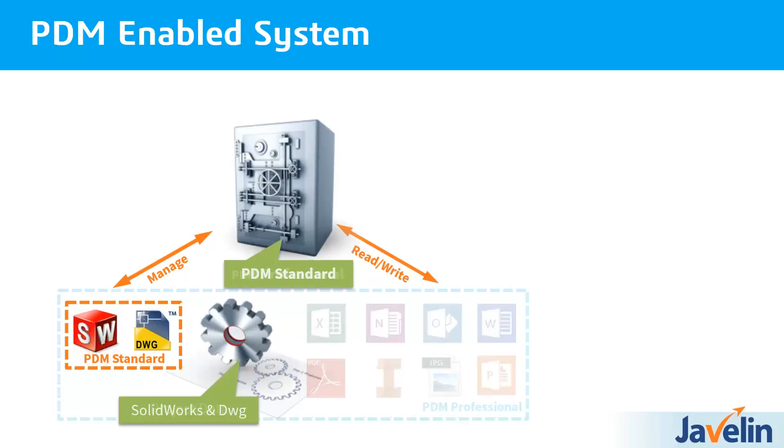Yeah, so just a visualization of how a PDM system works. With PDM Standard, which is SOLIDWORKS' answer to the replacement for Workgroup, we have the ability to manage CAD data—our SOLIDWORKS files and our DWG files. With PDM Professional, our capabilities are extended hugely. We can manage pretty much all of our product data—about 200 different file formats out of the box. We can also automate a lot of our processes, so we can do things like output STLs for 3D printing, or submit a file set to a certain department for testing and validation.

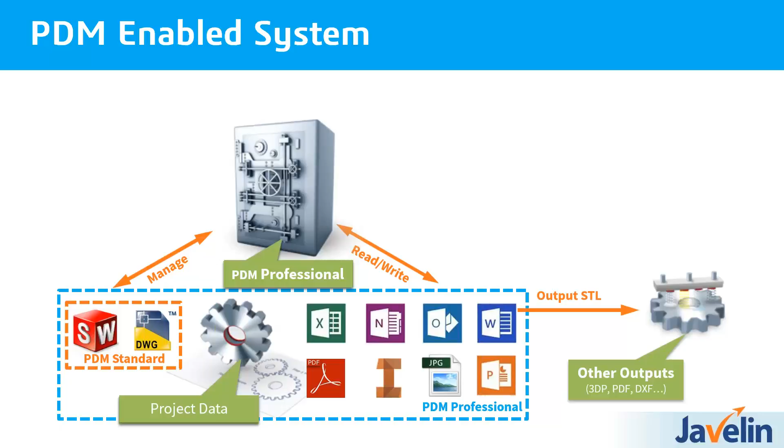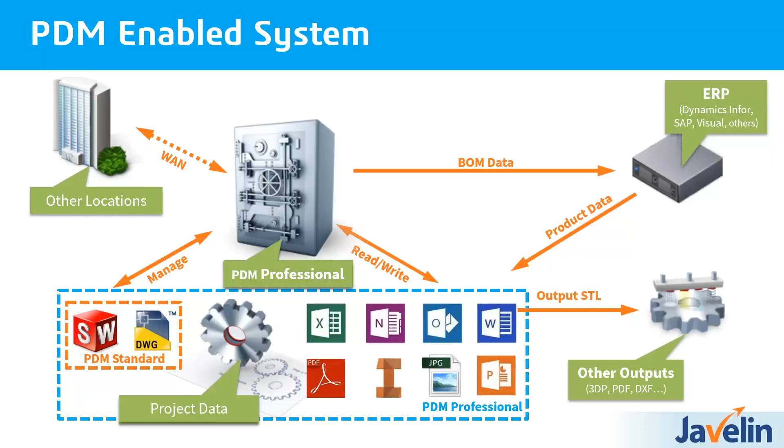We can also have multiple locations on PDM Professional working on the same vault, creating a wide area network. And of course, we can interface with our ERP and MRP systems if we need to do things like grab bill of materials or grab project numbers—we can interface with those programs as well. So PDM Standard is a great start; PDM Professional offers robust customizability when it comes to your product data management.

So today there are three main areas we're going to touch on in the what's new of 2017. We'll be going over the new enhancements in 2017, but also, for those just getting into PDM or thinking about PDM, we'll run through that as well, just so you get a sense of what it's all about.

So starting with the manage aspect of PDM, let's just jump right in and pop into our File Explorer here. If I just go to my main C drive, you'll notice it's the interface we're used to—everybody knows Windows Explorer. We've all had to use it at one point or another; most of us use it every day, at least 8 hours a day.

So it's a very familiar interface. Now I've got all these folders that you would expect to see, but at the same time I also have my vault as well. Okay, so the PDM server is a secure vault. If I double click on that, I've got to log in to be able to gain access to my vault.

So I'm going to log in as Scott E, the humble designer, and once I'm inside my vault, you can see it's generally the same layout, right? It's got the same feel, so there's not like you have to learn a new environment or anything like that. The only thing that's different is that all of our folders are green. Okay, so that's how we know that we're in our vault.

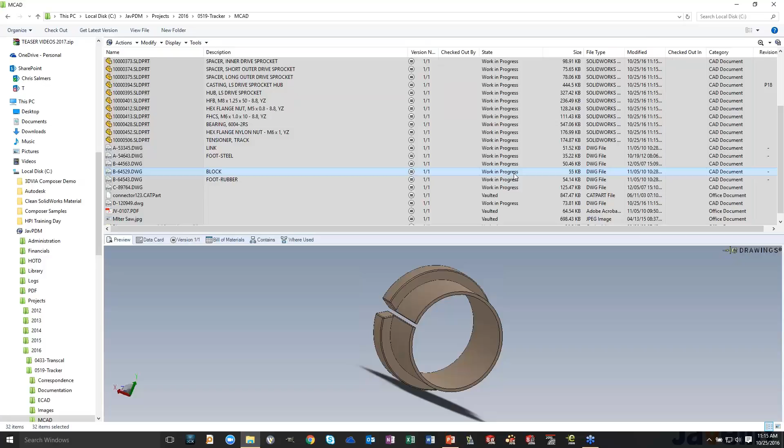So with PDM Pro, again, all of my CAD folders are work in progress, but I also have some folders that don't require sign-off. So PDFs get vaulted right away. Things like pictures get vaulted right away. Right.

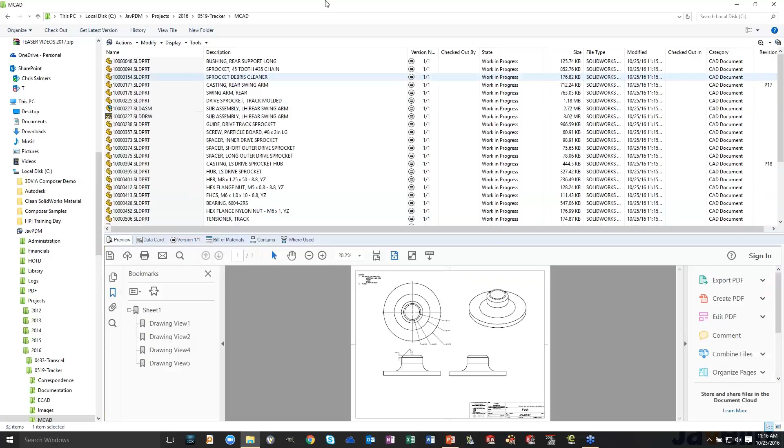So the first big enhancement in PDM 2017 is to be able to overwrite your last version. So you can see over here we've got version numbers, right? And they can get quite large, right? Especially if you're checking in parts every day that you're making changes on. You can get 40, 50, 60, hundreds of versions

of parts. And sometimes you don't want to create a new version because there haven't been any significant design changes. So with 2017, in fact, let's just open up our assembly here.

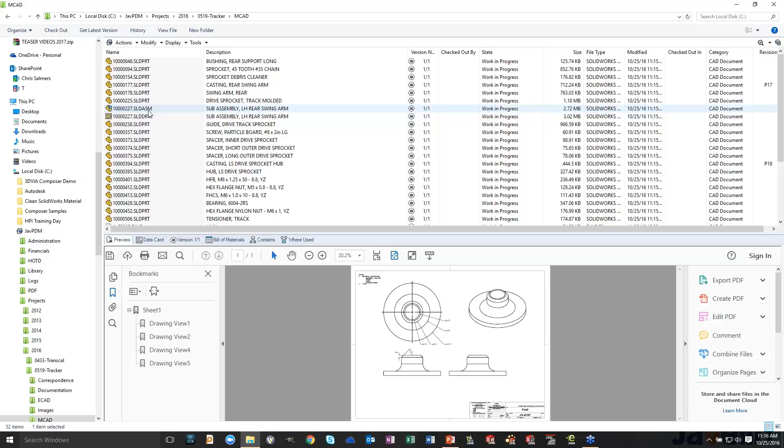We've got the option that we don't need to do that. And what we'll actually do is we're going to show you that in action. We'll show you how to set it up, and we'll show you how to use that as well.

So in this case, let's open up this assembly. Obviously, I don't have it checked out, so it would open read-only, because if I don't have anything checked out, I can't make any changes to it. So it asks me right away, do I want to check this out? Sure, and I can preview all of my parts here as well. So maybe this is the part that I want to make changes to, so I'll go ahead and check that out. And maybe I'll check out the drawing as well. So we'll go ahead and check those 3 parts out.

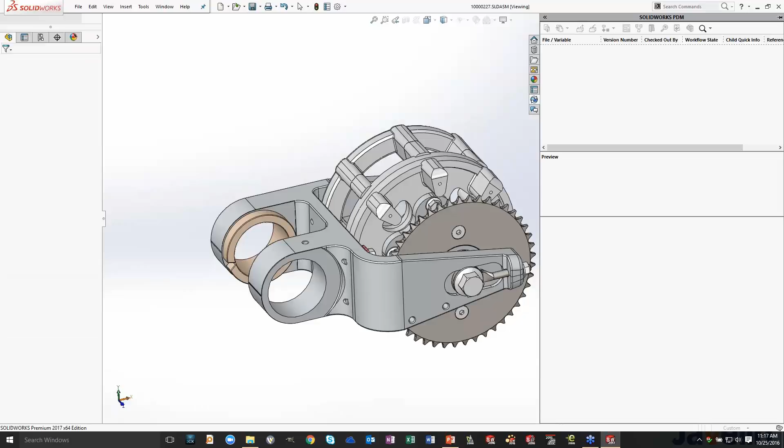And maybe this is the part that we're going to be making the changes to. Okay, so we'll go ahead and pop that open. And maybe we do a little bit of design work, and we kind of get here and we're okay with it. So maybe we want to save this, and we can go ahead and just get my control panel out of there. Let's just move this over here a little bit.

So we get an indicator saying that the part that we have is newer than the part that's in the vault. So we can go ahead and check this in. Now you can see I do have the overwrite latest version, but it's currently grayed out. So we're going to show you how to fix that. So for the first one, let's just say it's a round design that we're thinking about, and we go ahead and check it in, but we keep it checked out because we still want to work with it. We're not quite sure if we're done with it yet.

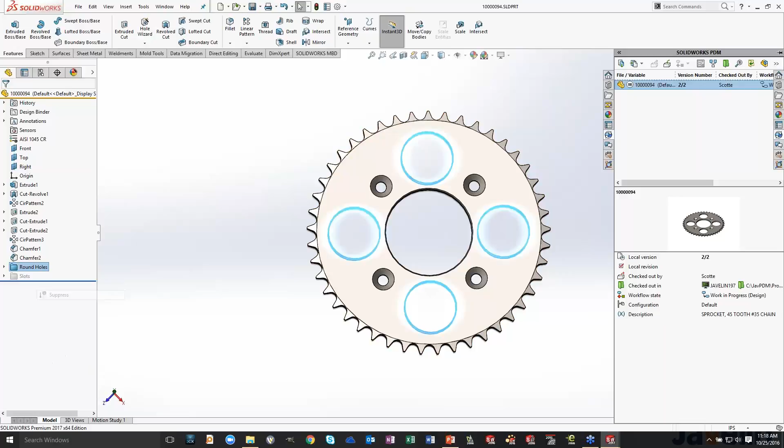So now let's say we do a little bit more design work, and we end up with this design. And this is actually the one that we want to go with. We decided we don't want the round design anymore. Well, we tried to check it in, but again, it was grayed out. So how do we fix that? Well, what we have to do is set some permissions in our administration tool. So if we go into our PDM administration, in this case, I'll go into my vault. And again, it's all secure access, so I'll have to log in as the administrator.

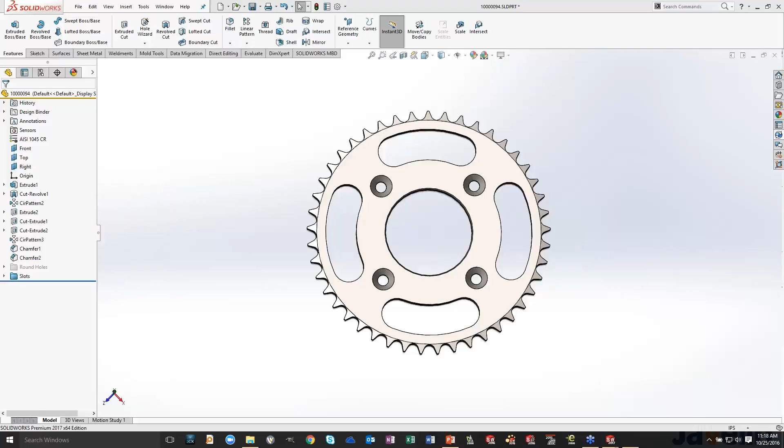And there's a couple of enhancements in 2017 that we can utilize to get this job done fast. So in this particular case, we've got Scott E., who's our designer, and he's part of the designer group, but maybe I don't want to give everybody in that group access to be able to overwrite the last version. Maybe I only want a couple people to be able to do that. So what I might want to do is create another group for designers. So now when we create a new group, we can call it what we want. Maybe we want to call it designer admins.

We can copy from other groups permissions and members. So let's go from the designer group. We can say copy the permissions and copy the members. So this is hugely speeding up the creation of groups without having to go in and reset all of these options. So we can copy those group options.

You can see now if I go into my group members, I've got all the members that were part of the designer group, and I can go through and say, okay, you know what, I'm biased. I like all my Scotts to be admins, so maybe I don't want to make Eric or Alex a part of this. So I can now take away people from that group that I don't want. And if I go through things like permissions, I can go to my folder permissions and say, all right, now let's give these guys access to overwrite the latest versions during check-in. So I'm giving those 2 particular people access.

Same thing in states. Maybe I want to use this through a workflow, right? Maybe I want to go to a design workflow, and during work in progress, I'll say you can overwrite. But notice that all of these other checkboxes are already there because we copied all of those permissions from that design group. So that can save a ton of time without having to go through and set things like search cards and permissions and everything like that. So we've got that set up.

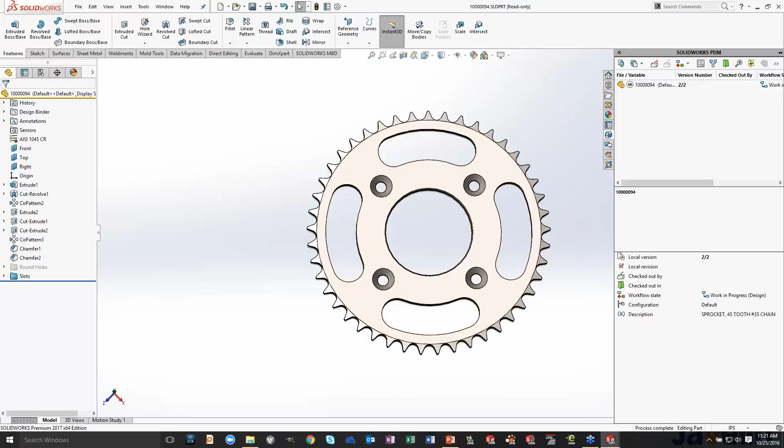So I don't have to worry about that other version that I didn't want. I can just say, you know, overwrite old version. Right? So now I still have version 2. The nice thing is that if we navigate to the history on this file, so if we go to contains, and let's find the one that we were working on there. So if we, whoops, and check out the history, it's still logging in that we checked in with version overwrite.

So even though we are overwriting a version, you might want to keep track of who's doing it and when it's being done. So you can still see that there was a version overwrite being tracked on that file and who did it, and when it happened, so that you can keep track of all the history on your part.

Some new enhancements as well when you're using copy and move tree. So maybe we want to do a right click and do a copy tree and copy this project somewhere else. Now if we select any options, things like including simulation results, naming drawings after models, that sort of thing, whatever we choose is now saved in memory. So when we go to do another copy tree, all of those settings are going to be saved. So we don't have to set those every time. So this is really good if you have a company standard for copying over projects to new folders.

So another great enhancement in PDM 2017 as well is that now the service packs for clients and servers don't have to be the same. They have to be in the same major release. So in this case, you'd have to be in 2017 for both the client and the servers, but they can be on different service packs. So you don't have to upgrade them both at the same time. Maybe there's a reason to upgrade your client and not your server. Not a big deal with PDM 2017.

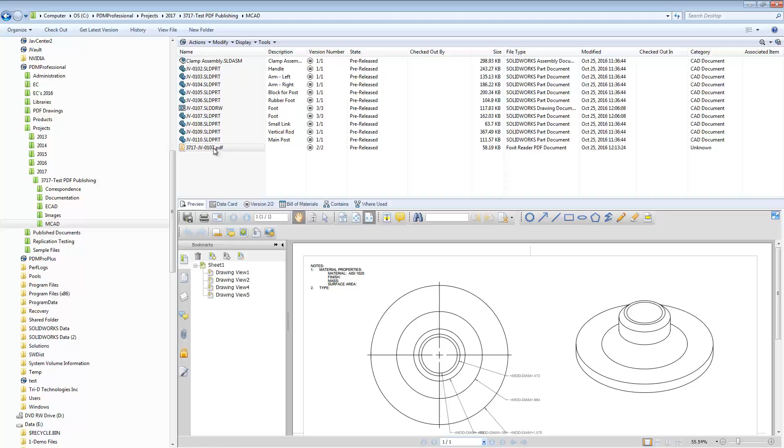Now we can also do this for workflow as well, if we want to do this as part of a workflow. So here I'm in my workflow. I can go into my approved workflow, and I can add in this task. So maybe I want to say at this point execute a task, and maybe we want to say run this only for drawing files when they go through this workflow. Run the PDF drawing task that we just set up, and say save the drawing as PDF. So now we can have this automatically trigger when we submit this for approval.

So let's go ahead and save this workflow. We'll exit out of here, and we'll run this through that workflow. So let's change the state, send for approval. So now we've sent it off to the manager for approval. We can say OK, and we can use our favorite searches, which is great. So we can have a favorite search, which is PDM Pro, and we can see everything that's awaiting approval. So in this case, today, let's filter it out. We can see there's the drawing that we want to use.

We can preview it. Yep, looks good to me. And we can go ahead and approve it. And now when it goes through that workflow, we can put in a password for an extra layer of security. And there's our PDF creation. We can go ahead and hit OK and close our search. And that will create a PDF for us. So a number of different ways that you can utilize those new variables.

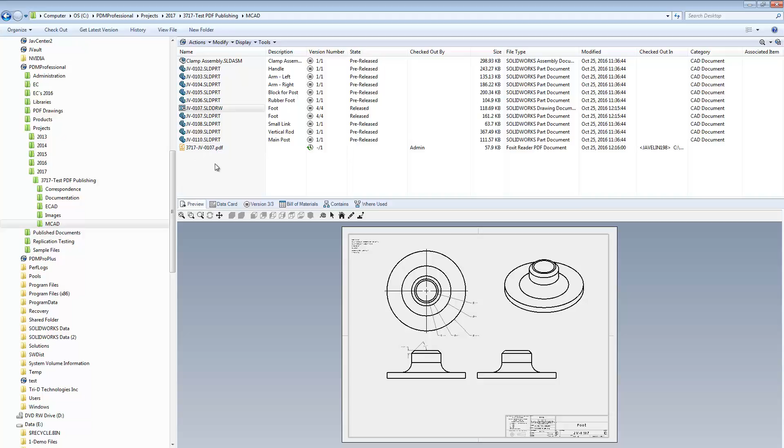And along with those new variables as well, we can do things like DWGs and DXFs to PDF. Right? So it runs the same way as you saw with the drawings, except it utilizes the DraftSight API to take that DWG or DXF file and create a PDF automatically through a task.

And another big one is being able to do Office files to PDF. So let's actually go through how to set that up right now. So first of all, in order to be able to utilize this, let's go into our administration tool. So let's go into, where are you? Well, we can just pop in here.

That's fine. I don't think you have access with your Scott login there, Scott. Yeah, I don't. I think I locked my designer down. Well, you know, Scott E. He's a bit of a troublemaker. I don't like to give him all the access in the world.

So we'll go ahead and log into our vault. You'll notice if I go under tasks, I have a new task called Office to PDF. This is new with PDM 2017. And if you don't see this in your vault already when you upgrade your vault, you can always start a new vault, which I've done right here as a test vault. We can go ahead and log into that one as well.

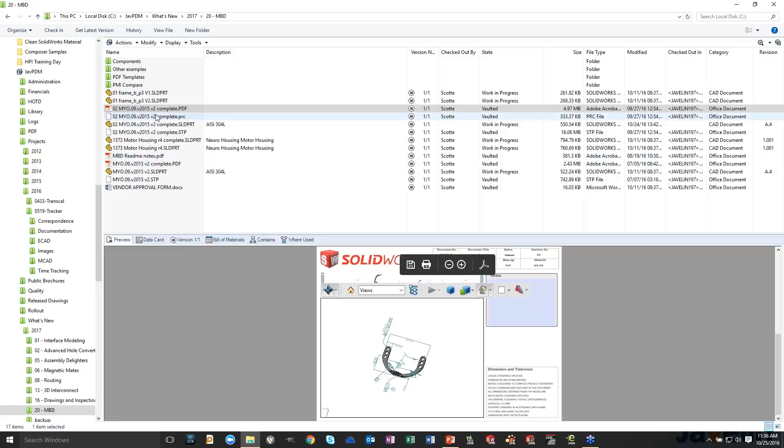Before you move on, because we're using 2017 eDrawings, there's also a number of other file formats you can preview as well. Let's talk about that right now.

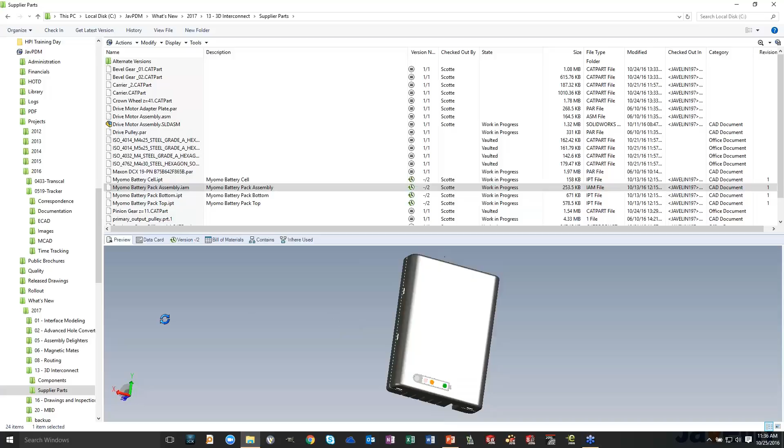With the release of eDrawings 2017, we saw a ton of other CAD formats that we can view and open inside of eDrawings. And because PDM uses eDrawings as its viewer, we can now natively view other CAD system formats. For instance, we can see this is an Inventor assembly, so we have full viewing inside of our viewer in PDM 2017.

We can also do things like CATIA. This is a CATIA assembly, so a huge amount of power there, and it's just great to be able to visualize those right away inside of PDM 2017. To clarify, that includes IGES, STEP, Inventor, and CATIA, as well as STEP AP242, which has that PMI information like you saw with that 3D PDF. Some great powerful enhancements to eDrawings 2017 that are able to be utilized inside of PDM 2017 as well.

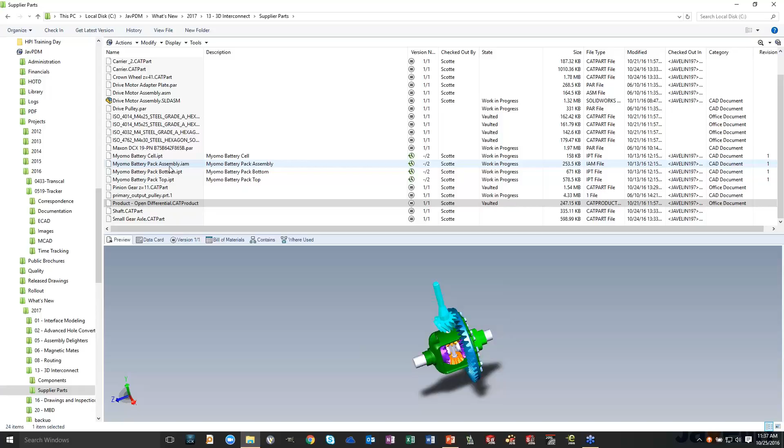Some great enhancements when it comes to automation, especially when it comes to creating PDFs for multiple file types. And the variable utilization is huge, especially when it comes to things like filtering out your parts or being able to keep everything organized—you can add in those variables for quick use.

The last section we're going to talk about is the collaboration side of PDM 2017, the first being our Web 2 portal. Let's jump in and take a look at what the Web 2 portal looks like. It is an online version of our Vault, and we are just in a regular web browser.

We can browse through folders, files, get previews, easily search for folders, and in PDM 2017, things like our Office documents—you can see everything's being shown with tabs. It's a lot cleaner of an interface. Even if we want to go to a Word document, everything displays very nicely.

And again, it's all online, so it doesn't matter what kind of computer you're on, as long as it has a web browser. We can preview all of our files in eDrawings very easily. The great thing as well is that we have multiple interfaces—you don't only have to be on a computer. It'll scale down for tablets, it'll scale down for phones so that you can do things like file approvals or evaluations on the go. You don't have to be in the office, and it's incredibly secure. This is all done by the new WebGL viewer.

Web 2 was completely rewritten in WebGL, and in fact it came out in 2016 SP4, so you already have access to it. It's been greatly enhanced, including the ability to restrict downloads. So maybe you want to give a customer early access to a project, or even a supplier access to your Vault—you can restrict what they can download to make your Vault as secure as possible. It's a great enhancement on that Web 2, and it's very convenient, especially if you've got sales guys out of the office who need access to your PDM.

And then another big enhancement is database replication. So the archive server replication we've been able to do for a while. So let's go over how that works.

In a PDM system, we have a database, and the database controls things like logins, general browsing through your PDM system. And then we have an archive server, which controls all of our actual data.